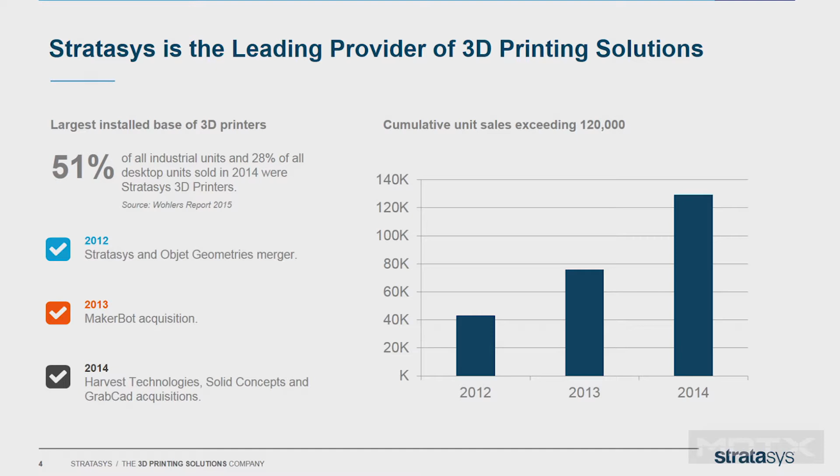A little bit about who we are. Fisher Unitech partners with a company called Stratasys. Stratasys, for the last 25 years, has been the foremost company in the 3D printing world. Over half of all printers in existence in America in companies today were manufactured by Stratasys. They lead the market, and Fisher Unitech is the largest Stratasys reseller in North America.

We have over 15,000 customers. We're in 22 states. We have the largest technical support staff of any company in the 3D printing industry. So that's a little bit about who we are.

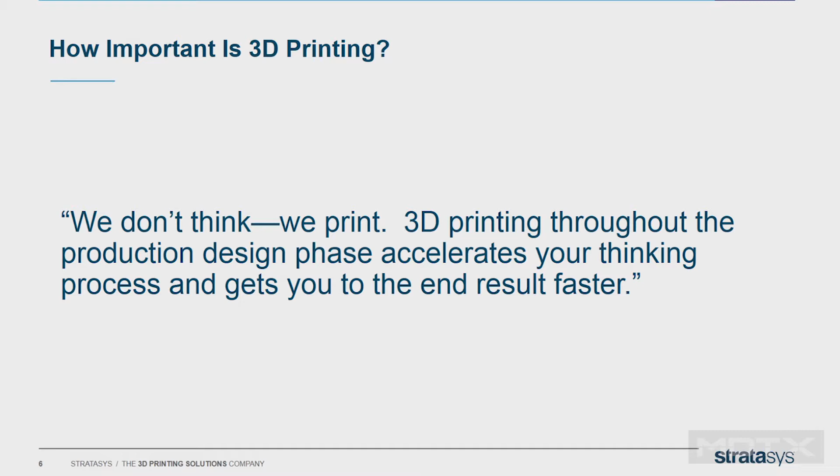Let's talk a little bit about how important 3D printing is. I thought it was appropriate to actually put up a quote from one of our customers. This is an Israeli startup that's a Stratasys customer, and basically this is a very bold statement that this particular engineer made: 'We don't think, we print.' Well, when you think about that, that kind of tells you how important 3D printing is in their development process.

So let's talk about that a little bit. First of all, who in here has had any experience with 3D printing in any way, shape, or form? Raise your hand. Okay, a few people.

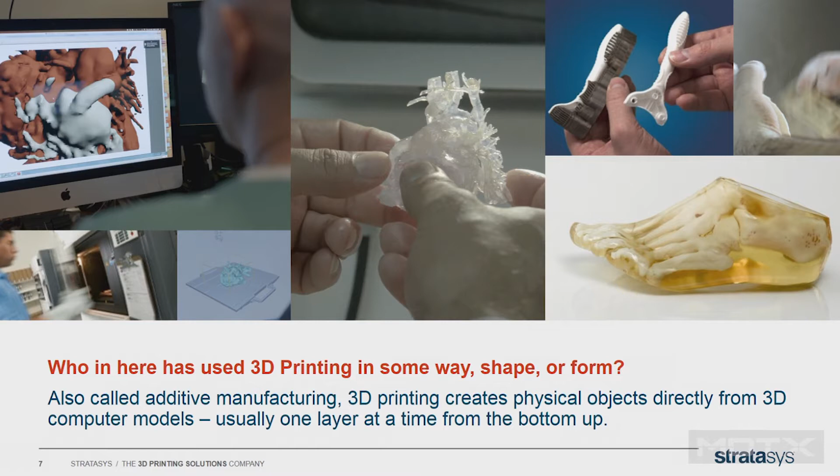So for those of you that aren't familiar with exactly what 3D printing is, it's also called additive manufacturing, and it's the process where we can actually create a physical model from a 3D computer file. And there are several, many different ways to 3D print using different materials.

We promote several different types of 3D printing. One is called fused deposition modeling, or FDM, where we utilize a high-performance thermoplastic, heat that, and apply layer by layer from the bottom up to create a 3D object.

We also promote a technology called PolyJet. PolyJet uses photopolymer resins and, in something very much like an inkjet printer, lays down a very thin layer of this resin and then passes it with an ultraviolet light to cure that.

We have an example of a 3D printer right in our booth, right behind the audience, in the orange Fisher Unitech booth. And then we also offer a product that prints actual metal parts, okay?

So why 3D printing in medical? Every other industry in the world is utilizing 3D printing, including medical. It's been a little bit of a slower start in the medical field. There are some regulations and things that have to be adhered to in the medical field that make it a little bit more difficult to rapidly grow into this field, but it's very viable.

And we are doing 3D printing in medical to try to keep pace with some of the challenges in that field, as you well know. And there really are three major challenges right now that 3D printing is able to address and help. One of those is the rising cost of healthcare.

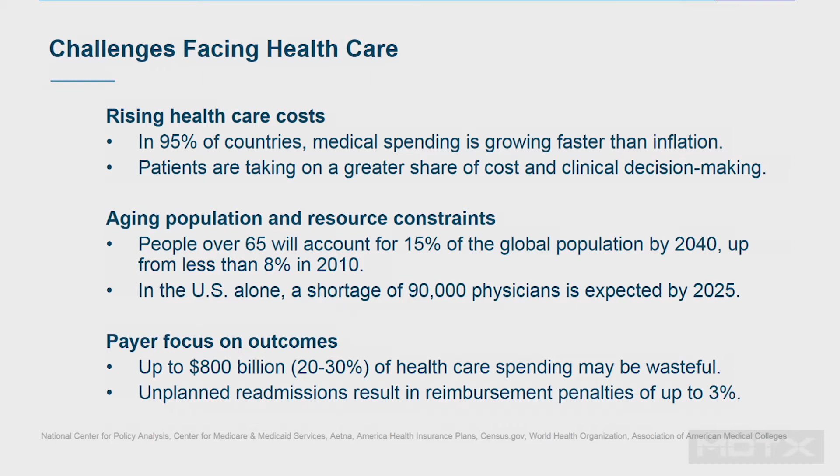And the third one relates to insurance companies. Insurance companies are now paying hospitals differently than they have in the past. Instead of the traditional fee-for-service model, where surgeons or doctors would perform an operation and the hospital would get paid by the insurance company, hospitals are now being reimbursed based on outcomes—patient outcomes.

And that takes into consideration many different factors, including patient satisfaction after the fact, whether they got readmitted after the procedure. Many things enter into this, and in some cases, hospitals that can't meet those guidelines are actually being penalized or having reimbursement monies held back until they're able to improve those processes to meet all the guidelines.

So it's a whole different landscape out there, and 3D printing in the medical field is very important because we address each and every one of these. Let's talk a little bit about 3D printing in your world.

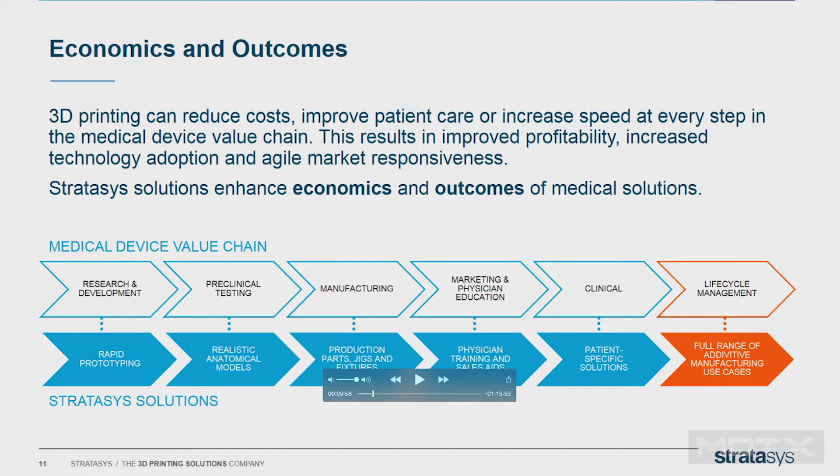If we look at the product development lifecycle, the arrows across the top in white are the major buckets you deal with when developing products. The arrows in blue are some of the solutions that 3D printing offers to help improve upon those areas. Let's take a look at those one at a time.

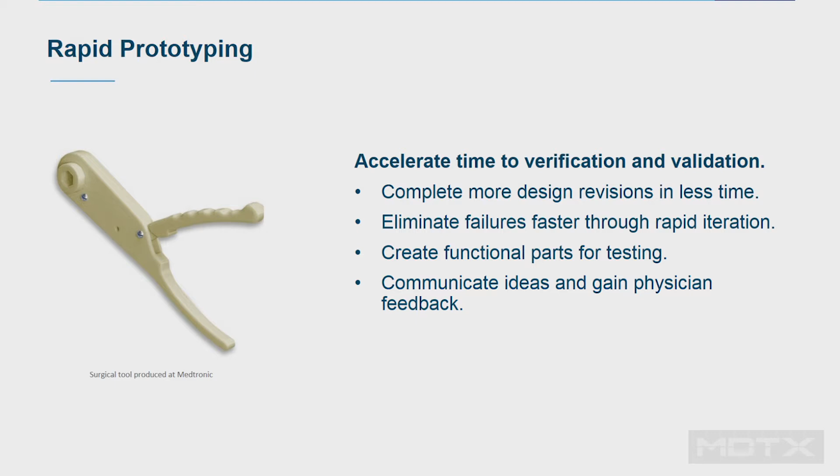In terms of research and development, this is where ideas come to life. 3D printing is giving companies the ability to rapidly develop prototypes of the ideas and products they're trying to bring to market, and they're able to do so much quicker and at much less expense than in the past.

That's important because in product development there are a lot of changes made along that continuum. The ability for companies to print actual models that they can deliver to a physician or surgeon, and give them the ability to hold it and spin it around in their hand and try it out, there's nothing like that. I came from Stryker, and the implants we designed went through stringent testing and iterations with our surgeon consultants.

Prototype tooling: not only are you able to develop aesthetic prototypes that look good, but with 3D printing and some of the materials available, we're able to put those prototypes through a testing process. We can actually make injection mold production parts rather quickly and very inexpensively.

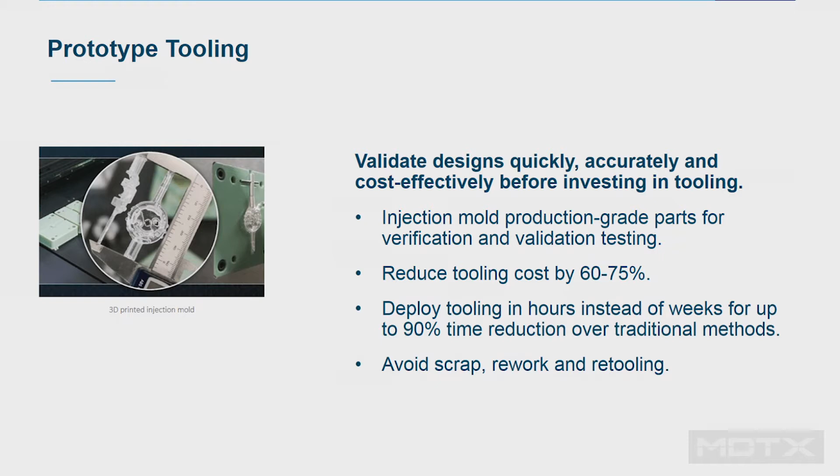Injection molding and tooling is very costly. It takes a lot of time, but more importantly, a lot of money. Being able to print these molds out in hours or days versus weeks or months is invaluable to companies, reducing costs by over 60% and reducing time by over 90%, bringing products to market much quicker than in the past.

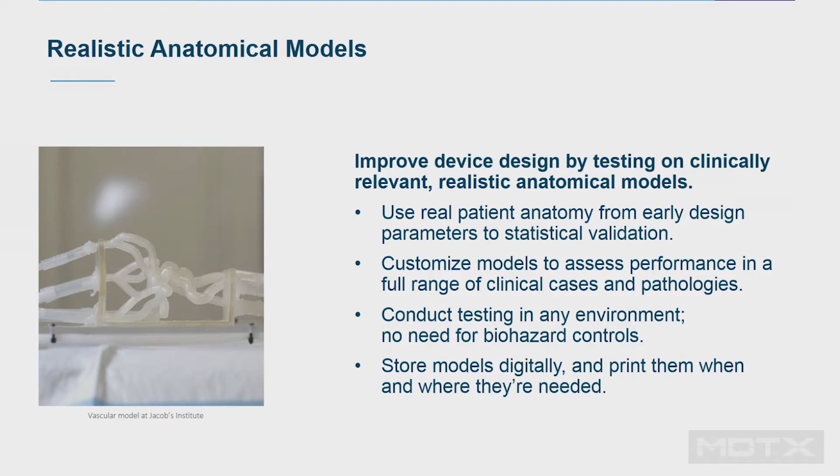Let's talk about testing of these products. With 3D printing, we're able to produce realistic anatomical models, and these models are made of various materials. They can mimic bone, they can mimic soft tissue.

These models, as you see in the picture here, this is a vascular model used at the Jacobs Institute in Buffalo, New York. They literally hook these models up to devices to test fluid pressures and heat, putting them under realistic human environments to test medical devices. Being able to test the device prior to taking it into the operating room is so important to our surgeons.

We're able to help eliminate the trial and error it used to be by developing these models. The beauty is these models can be printed with specific pathologies, not generic models off the shelf, but patient-specific models in some cases for real-life testing. And they can store them digitally and use them down the road to train other surgeons and residents.

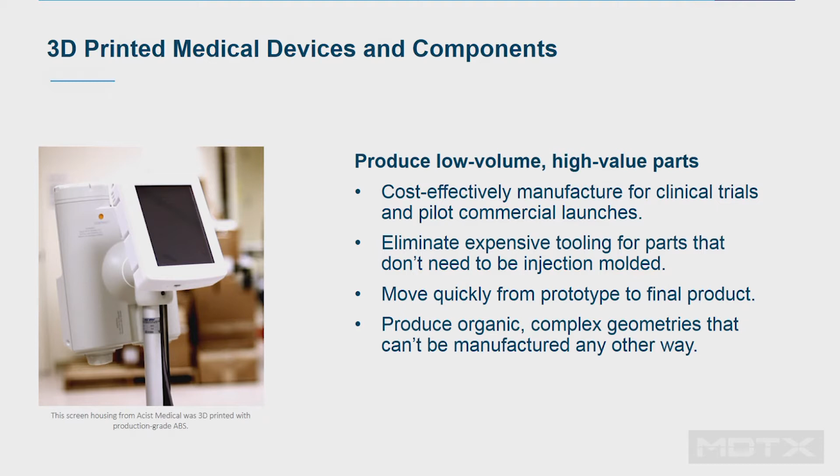In situations like this, where it might be a rather low volume production run, say the housing on this particular device, being able to produce those directly from a 3D printer at a high enough quality that it looks like a finished product is a great thing and can help move the process along quickly.

Also in manufacturing, with a 3D printer in-house, companies are able to produce jigs, fixtures and tools to speed up the design and the actual putting together of materials into parts. These things can be built on site in a short amount of time, literally hours or days versus weeks or months. Being able to cut the time from concept to finished product using 3D printing is a big value.

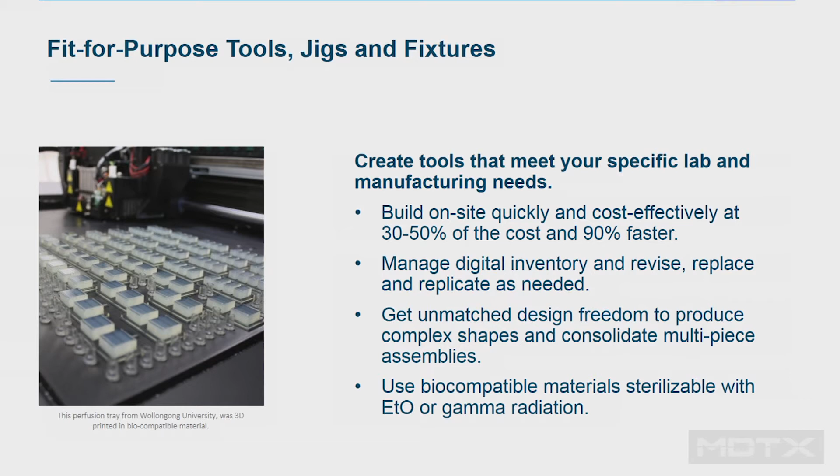Also, the materials we've developed through Stratasys probably represent the largest library of 3D printable materials in the world. These are materials with electrostatic capabilities, biodegradable capabilities, and properties where they're chemical resistant. So you name it, there are materials either existing or in development right now to accommodate your needs.

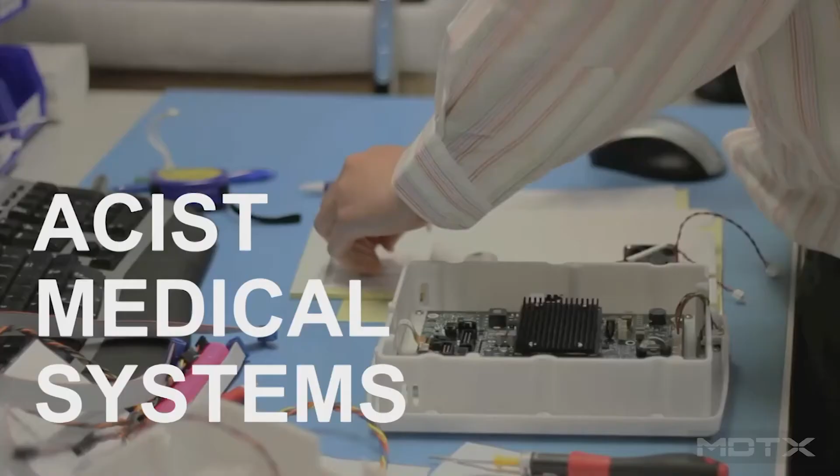We looked at a device a few seconds ago from ACIST. Let's take a moment to hear from some of the folks at ACIST exactly how they're using 3D printing.

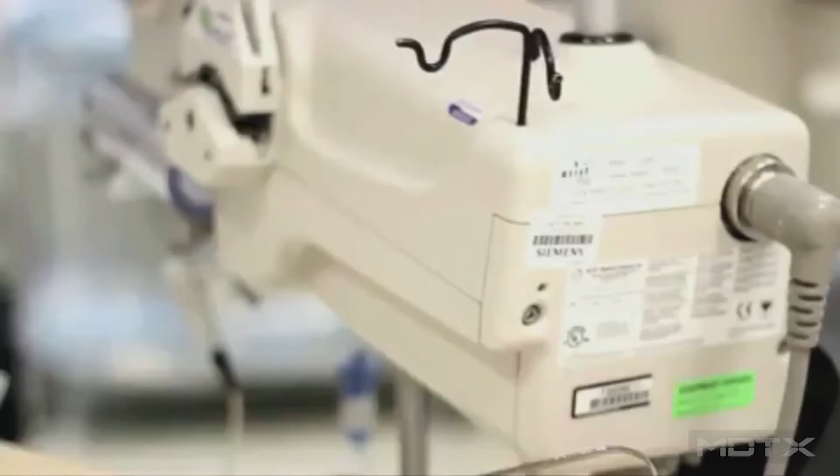ACIST is a medical device company. We primarily design and develop injection systems for delivering contrast. ACIST has revenues of approximately $100 million. We have 220 employees worldwide.

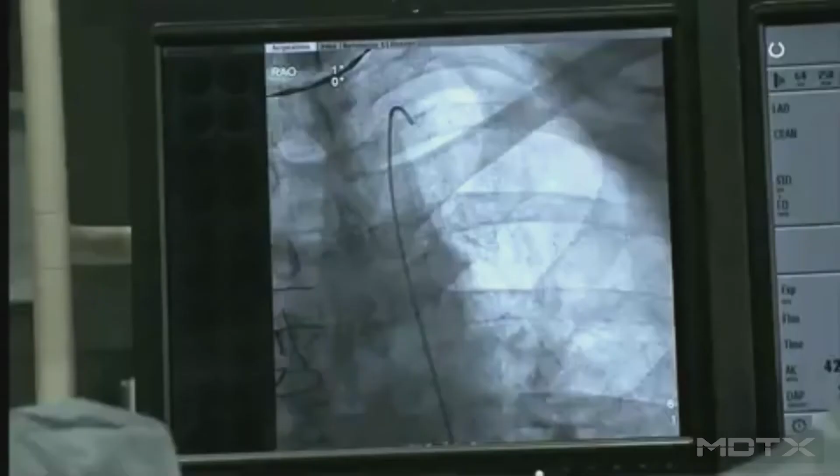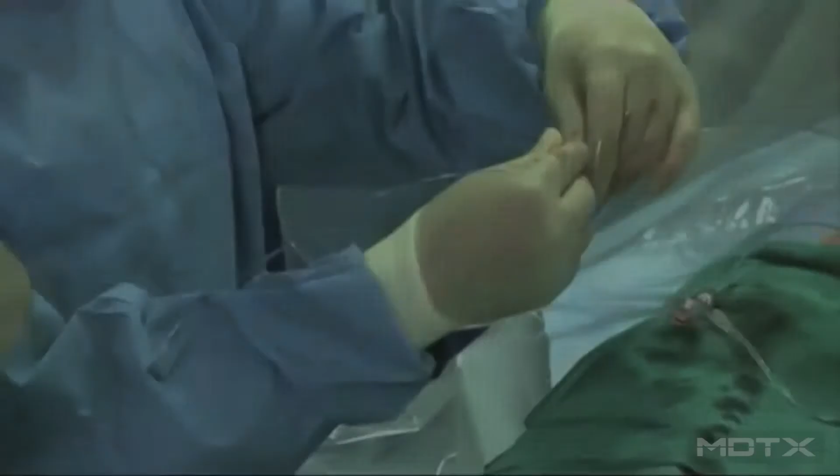We've automated the process of injecting dye into the vascular system, allowing physicians to visualize anatomies in order to do therapeutic solutions. Since 1998, we've performed over 10 million procedures. Our key customers are the physicians and clinical technicians that use our product day-in, day-out.

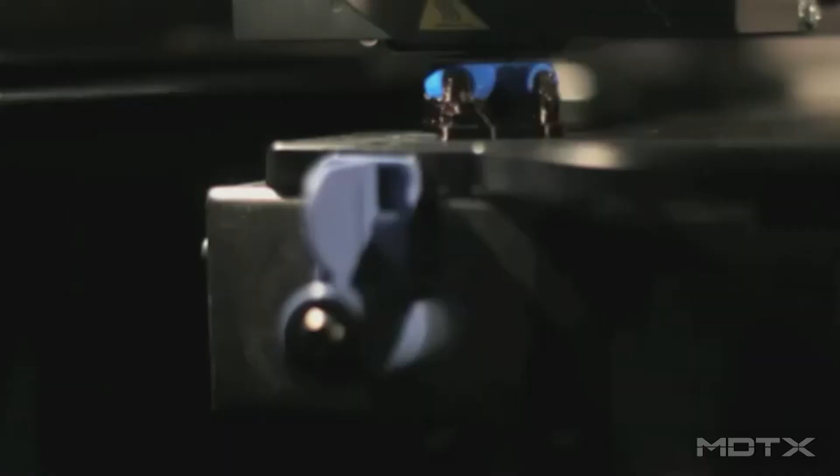Where our efficiency really comes from is how do you get that new solution in front of that physician? How do you get it there quick? The FDM process allows us to develop machines and design the overall solution very quickly. It's a world of difference between machining versus something you can print in a day.

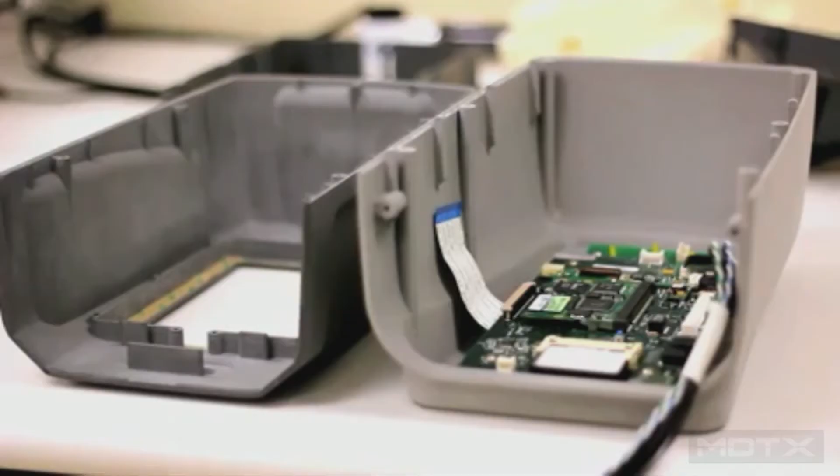When we bought into the FDM technology, we never pigeonholed ourselves into a particular arena. We like to use it for everything - functional testing, making fixtures. We're also looking at using it in some end-use parts and some products. We use this technology for production parts.

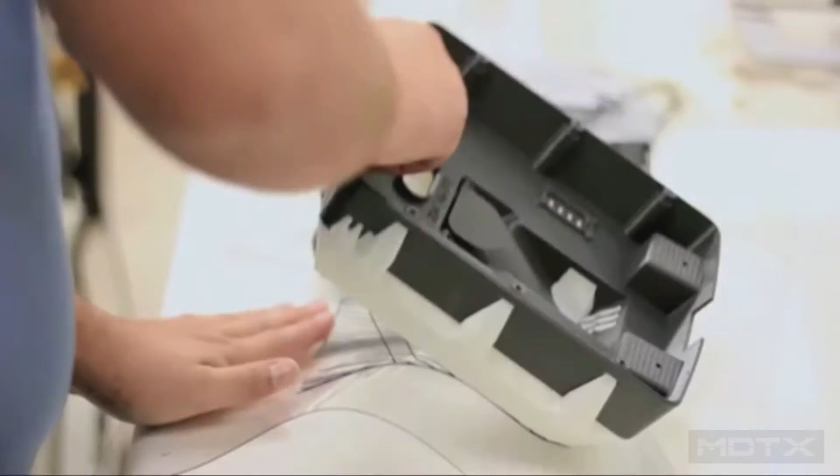The CTA is a lower pressure injector. We're going through a product update, and we're really looking at producing maybe the first production run using the FDM process. It makes a great substrate for the process and for the parts. It also allows us to really do some design for manufacturing and eliminate a lot of pieces.

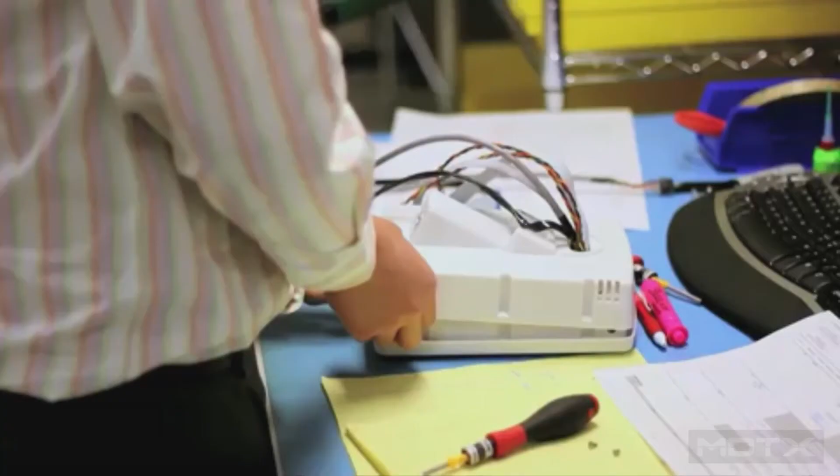You can reduce part count by putting complexity into one part. It also allowed us to develop the product and get a new updated version to our customers. It's pushing out our decision on the moldings - you don't want to invest in new mold or new technology until you're quite sure that's what they want.

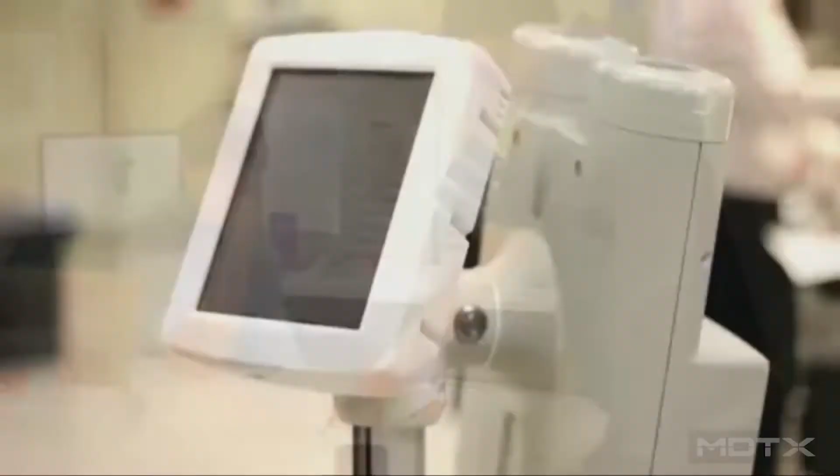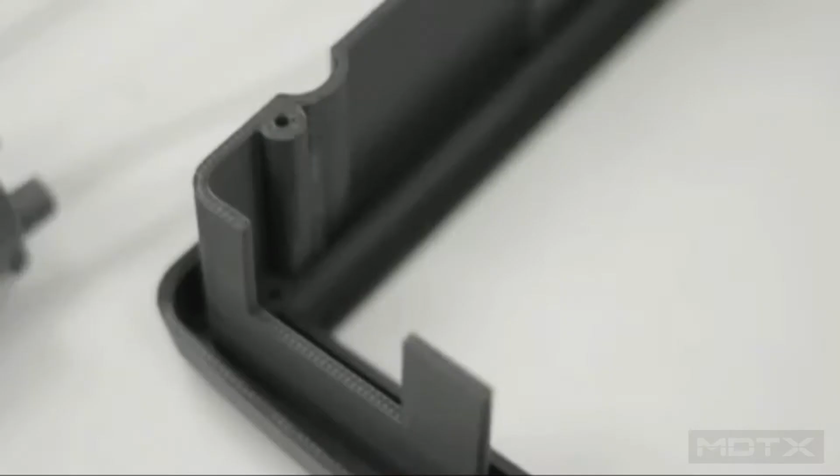This is a truly just-in-time, on-demand inventory. If 3 years from now, the customer that bought the machine says, hey, we dropped it and they want that replacement part, with this process all I have to do is simply go back to my file, and I can reprint that part - only one part that day - but I've never carried that inventory. When you look at all the lean technologies and opportunities out there, this is probably the leanest, best example of managing inventories and keeping only what you need.

And if you can design with FDM in mind, there's so many benefits you can have, but it has to become a mindset.

What the FDM technology allows you to do is really put a plastics manufacturing center inside of a lab. It allows you to make any geometry out of any file, and you're never stuck with one design. I think it facilitates the creative process.

It really has changed the whole industry significantly as far as how long it takes to get products to market. It kind of changes the dynamic, and it really sort of upsets the traditional manufacturing world. And if you've got the right volume and the right product, FDM can solve a lot of problems.

Oh, you're doing fine. I'm just going to take a moment of your time.

Hey, who in the audience is using 3D printing right now? Wow, that's a lot. How many of you are thinking that you may use 3D printing in the next year at your company? How many of you would like to use 3D printing, think you should use 3D printing, but your management isn't going to go for that just yet? Not a lot of hands on that. There you go, your audience. Thank you, Joe.

That's great, I'm glad to see there's a wide use of this. Feel free to stop over, we're in booth 325. Our booth did not show up yesterday - I wish I could have 3D printed that yesterday afternoon, but unfortunately we weren't able to do that.

Marketing and education - another thing some of our customers are doing is utilizing their 3D printers to create realistic sales models that the sales team and marketing teams can take out to visit hospitals and physicians, to demonstrate their medical devices and some of the features and benefits of their device with these 3D models.

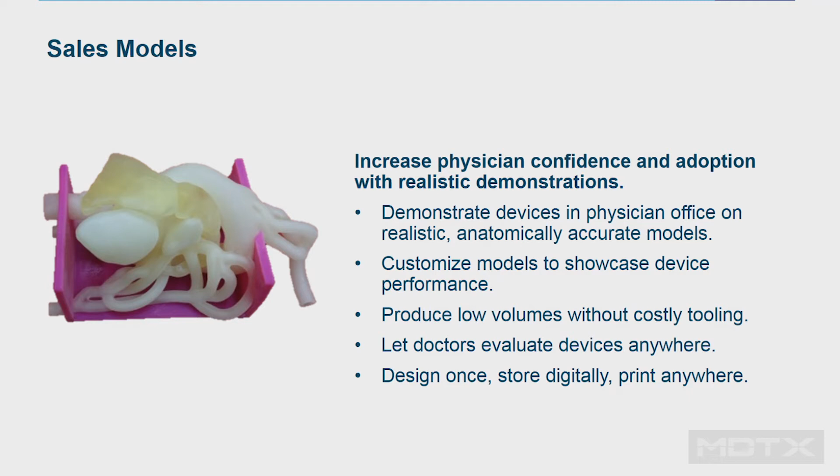Absolutely, once you have a 3D printer and understand there's so many things you can do, you realize how important it can impact many of the departments within your company.

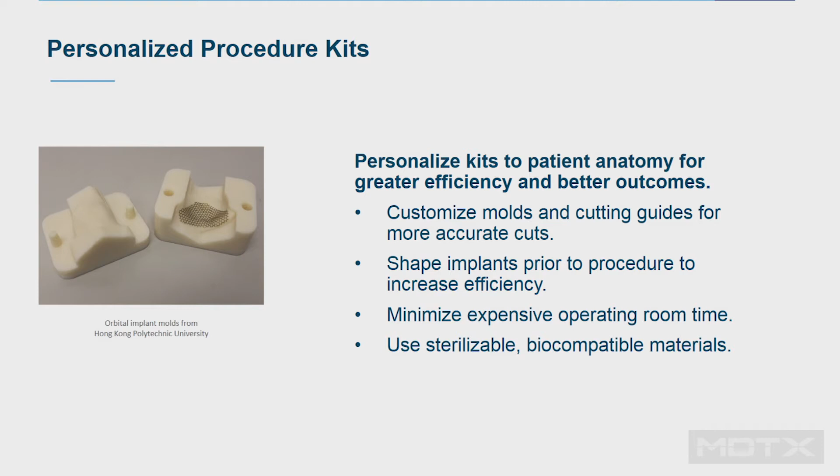From a clinical standpoint, companies now are actually creating patient-specific implants, patient-specific cutting guides, things that can aid in the operating room - which, folks, I can't tell you, having worked at Stryker and with physicians in the operating room, nothing is worse than having these physicians get into a situation where something comes up that they didn't anticipate.

3D printing gives these physicians the ability to practice ahead of time, and these types of models save time in the operating room like you can't believe. With operating room time costing anywhere from $60 to $120 a minute, that's important.

And that's important to the hospital, and that's important to your physicians to be able to save time. And surgical preparation, we just touched on that.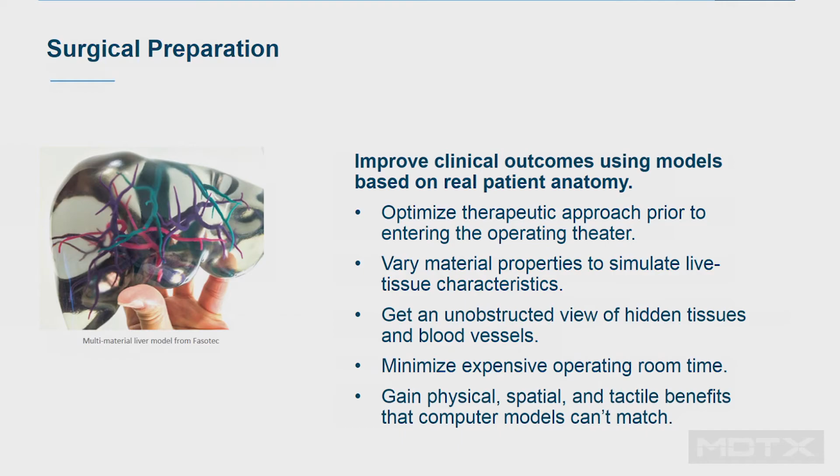Again, think about the aerospace industry. How many of you would fly with a pilot that never once got into a plane and practiced, or never spent time in a simulator? We just wouldn't do it. But in the medical industry, unfortunately, up until now with 3D printing, they've really had no way to have that simulator. Here, through 3D printing, surgeons are actually able to print out a specific model of a patient's pathology, practice with their device first, and feel comfortable going in there that they're going to do the right thing for the patient. Take a short video here to talk about one other aspect and how surgeons use this technology.

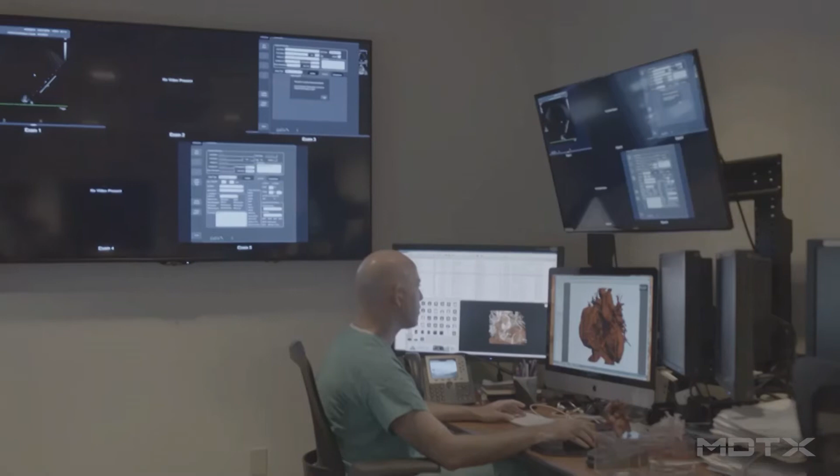With an abnormal aortic arch, it's a rare problem, but we see it a lot. Because it mimics asthma so much, I think it often goes misdiagnosed. So Mia lucked out, she had a really good doctor who said, I don't think this is right. So when we were able to make the diagnosis of her double aortic arch, it was very satisfying.

So then the challenge is a surgical one. How do you divide this double aortic arch and save her life without hurting her? A lot of these babies' hearts are like Rubik's Cubes, and you can't give somebody a piece of paper with a picture of a Rubik's Cube on it and say, how do you solve this? You have to hold that three-dimensional object in your hands and then come up with a solution.

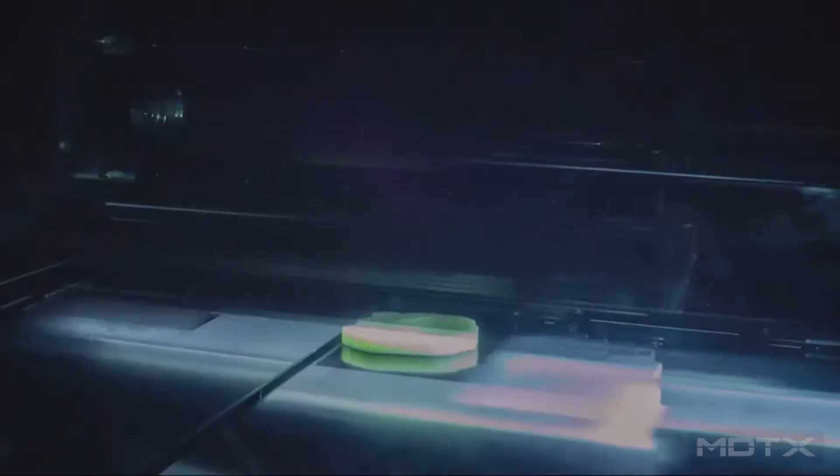At Nicklaus Children's Hospital, we're actually using 3D printing to assist the surgeons with their surgical planning and teaching of new medical students. So having the ability to make these 3D models, to look at them on a screen, but also to print them out and hold them in our hands, has really made a fundamental change in how we view a lot of these diseases.

Make a 3D model of her very complex aortic arch vessels. We were able to figure out which part of her arch should be divided to achieve the best physiologic result. I showed the family their daughter's heart. I hate opening up a textbook and saying, this isn't really your baby's heart, but it kind of looks like it, here's how we're going to do the operation. That doesn't resonate with them.

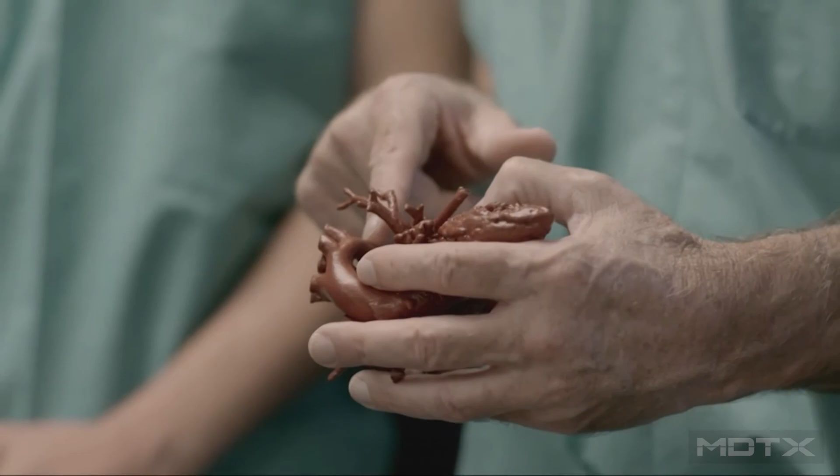I showed it to them. I said, this is what's choking your baby. This is why she's taking all those medications and why they won't work. It's very powerful when you show a family, this is your baby's heart, and this is how I'm going to repair it. We've gone through planning an operation on a patient who was told, hey, you're inoperable.

We made a 3D model, and I literally carried it around in my gym bag for a couple of weeks. So I would reach in, take it out, and look at it until it finally dawned on me that there was a relationship that we could exploit. Well, why experiment? Why go into the operating room and hope, when we've got a model and we can actually test the device in the model and know with certainty this is going to work?

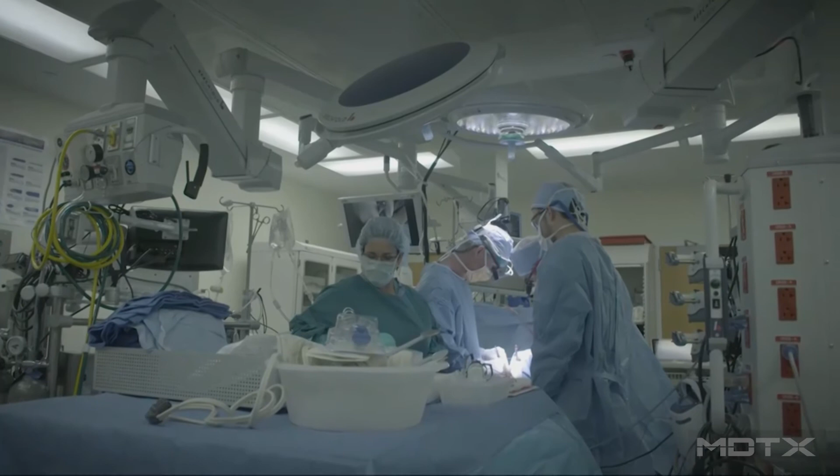They could feel confident that we were going to do the right thing. When we did the operation, we took intraoperative images, and they looked exactly like that model. From having 4.5 years of not knowing, to all of a sudden in less than a 2-month time frame, she's back out of her surgery and back to normal. So that's been a great experience for us.

She's very active, she loves dancing, she loves baseball, she likes doing everything. So now it's just going back to normal life and not being worried.

Show them the level of sophistication that you have. Show them what you're capable of. A 3D printed heart, accurate to the most minute detail, has been the difference maker for me. It's helped me take somebody from being inoperable to operable, and we've saved their life.

Folks, I'll close with this. 13 years ago, I had my hip replaced. And as amazing as that operation was, and it took the pain away, and I feel better and have a better quality of life, that type of thing, that did not save my life.